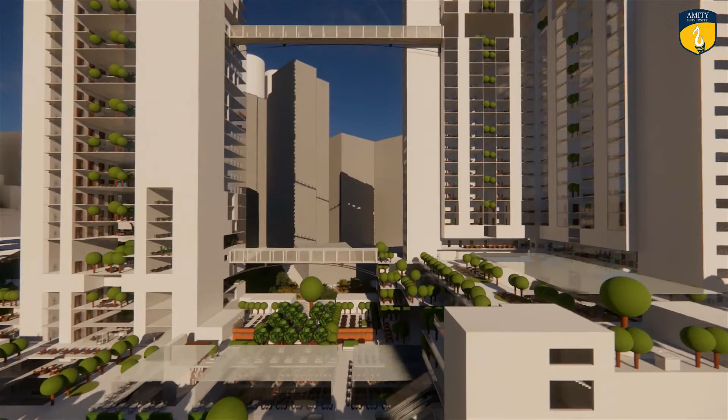Universities are typically horizontal organizations of purpose-built structures, connected by their open spaces of quadrangles and courtyards. A vertical approach to connecting the components of a traditional university organization is rare. Mostly tall structures are used for single purpose, however there are recent examples that develop the multi-program vertical university model, combining the connective quality of the university environment while working within the parameters of tall building model.

The project aims at designing a vertical university as a sustainable design solution for future generations, which can be widely adapted as and when there is a limited scope of horizontal expansion. With the increasing population and growing needs for basic amenities, future of Indian universities will be vertical expansion, which will cut off the requirement of 20 to 25 acres of land to 5 to 7 acres of land.

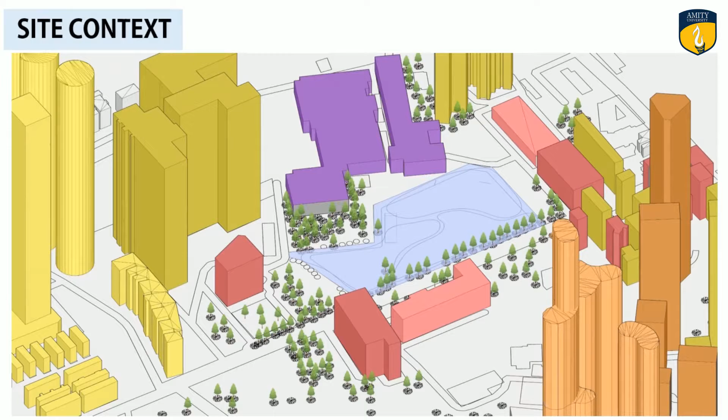In metropolitan cities like Mumbai, the vertical university is the project in pipeline in various parts of Mumbai. The proposed site is in Lower Parel, Mumbai, which is the future central business district of Mumbai, under Smart City Mission of India. The site has a wide range of mixed-use contextual development going on at present, where world-class educational institution will play its role.

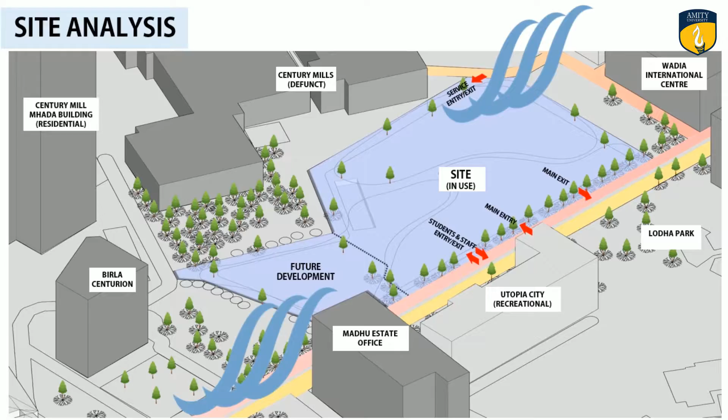60% of the site has been utilized for the project, with entries from the only approach road Pandurang Budhkar Marg with ROW 24 meters. The wind flow is from southwest to northeast.

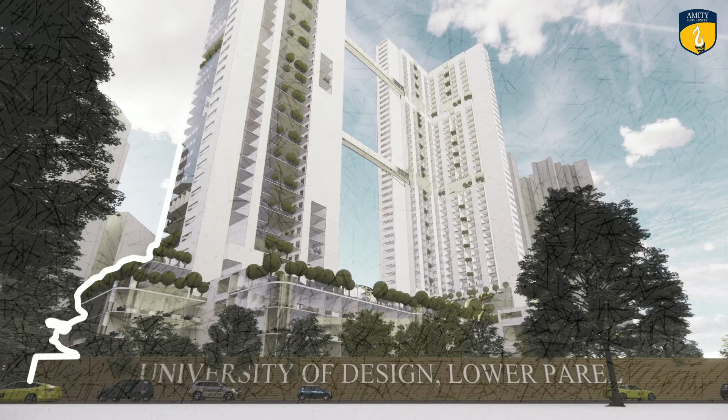Zoning of the site provides us public, semi-public and private zones for further massing. The vision of this project is to not only create a university of design and experimenting it with the principles of high-rise structures, but to also create an identity for the city and catering to the future needs through sustainable solutions.

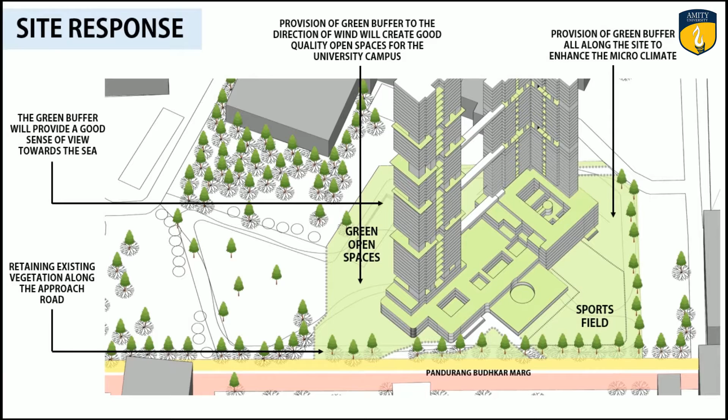As a response to site condition, position of green buffers and high-altitude terraces were conceptualized. Efficient and segregated circulation pattern for different stakeholders is taken into consideration.

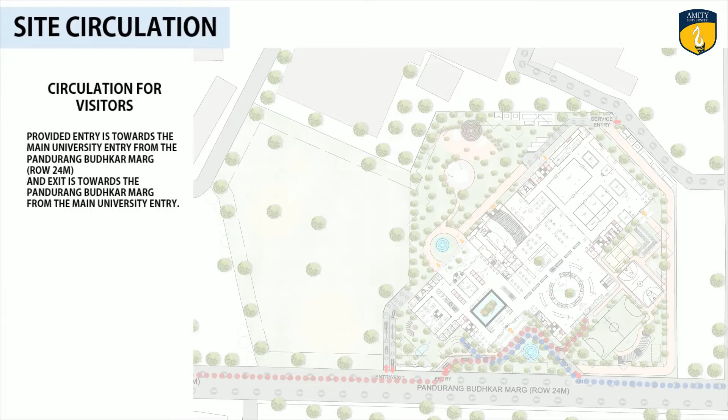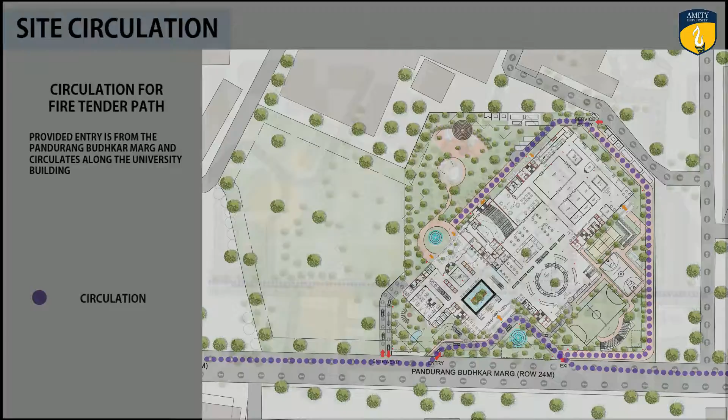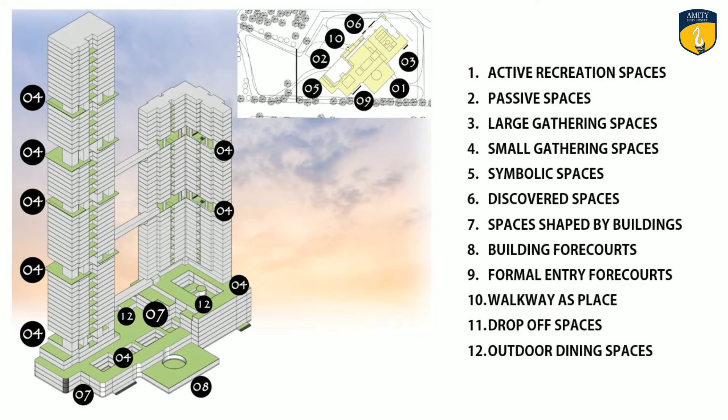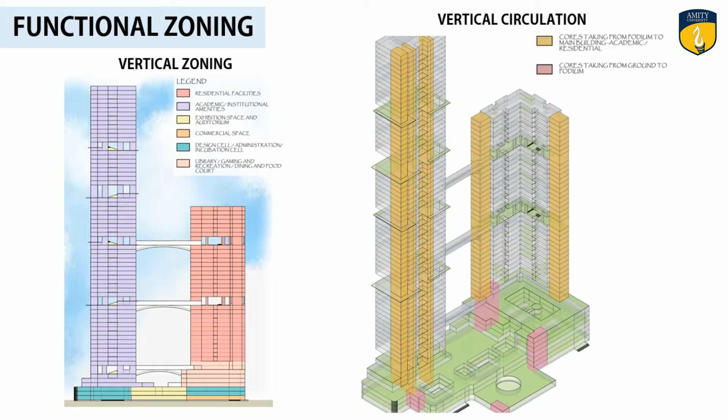The conceptual approach taken into consideration is derived from open space typologies required in a university campus, which is then segregated along horizontal and vertical axis, simultaneously. Various functions such as administration, incubation, commercial, recreation, academic and residential were organized vertically, with direct or connecting circulations. School of Architecture, Design, Fashion, Communication, Visual and Performing Arts was stacked vertically to form a University of Design.

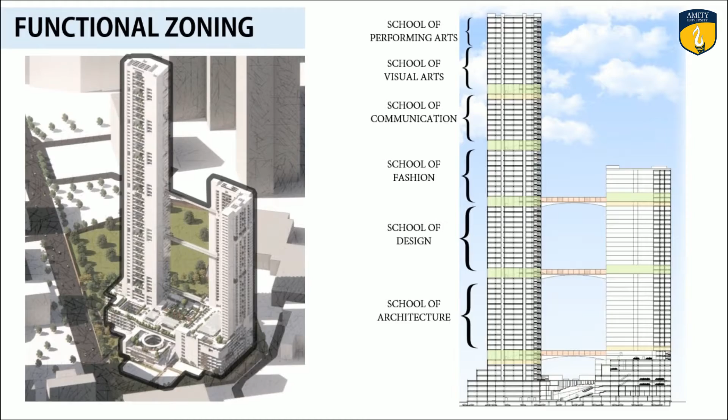Walkway bridges were connected at various levels to ease the circulation.

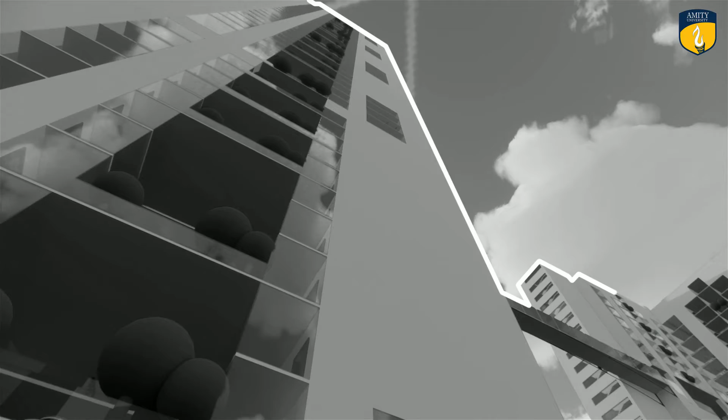The university building becomes an iconic structure for the city and adds to city's architecture. Pedestrian connectivity to the main entry of the university from the approach road, keeping in mind the different means of transport used by the stakeholders.

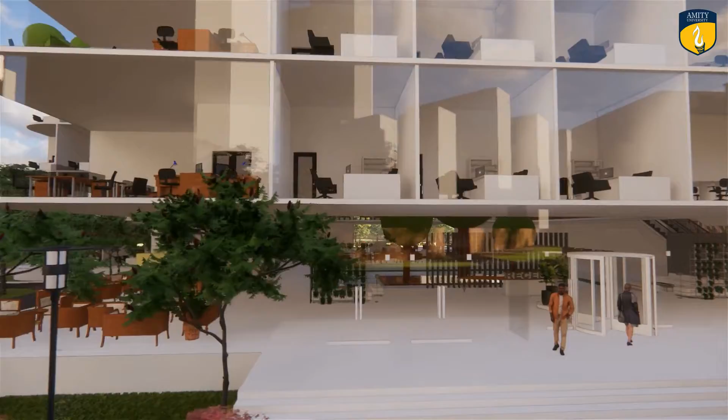Sports fields connected with the terrace and exhibition space to create visual and physical connections.

The academic building is 70 stories tall, with the residential building having a height of 40 stories.

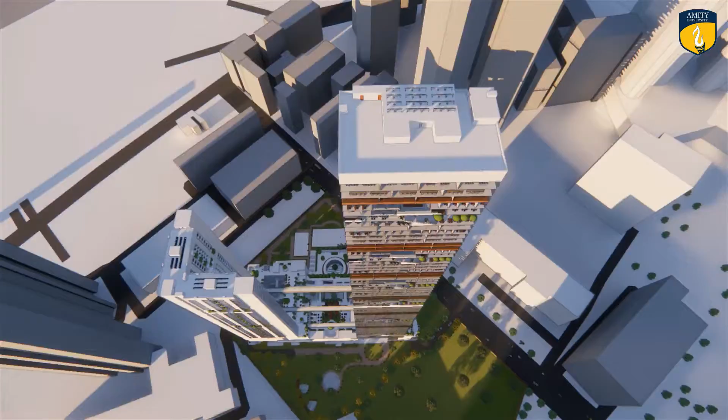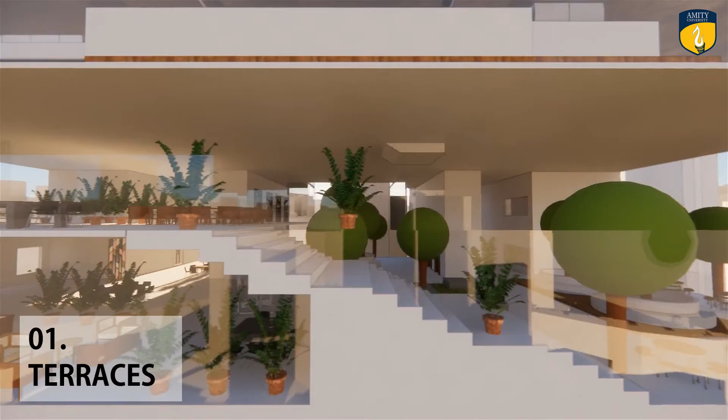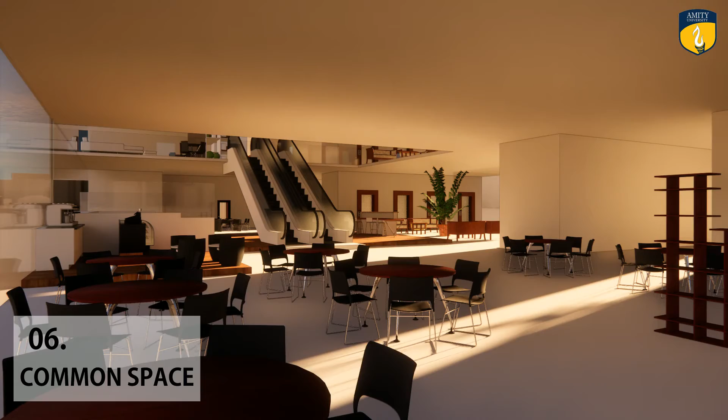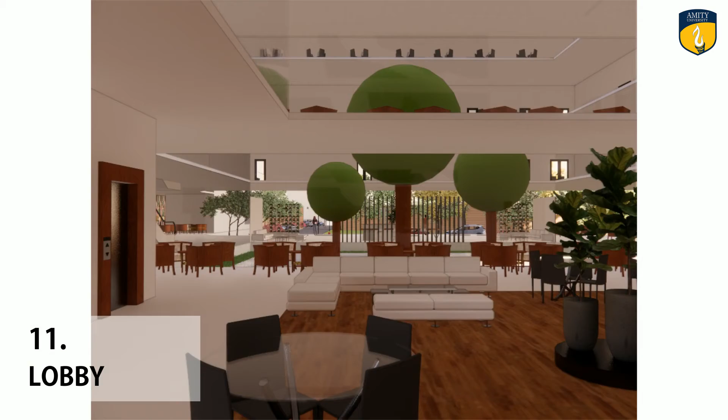Academic building terraces act as vertical connections and common activity spaces between various schools, studios, jury rooms or formal activity rooms, lecture theatres, workshops, common working spaces, informal activity or open working spaces, library, exhibition spaces, entrance and lift lobby, administration office spaces, open spaces, hostel accommodation rooms, and hostel building terraces.

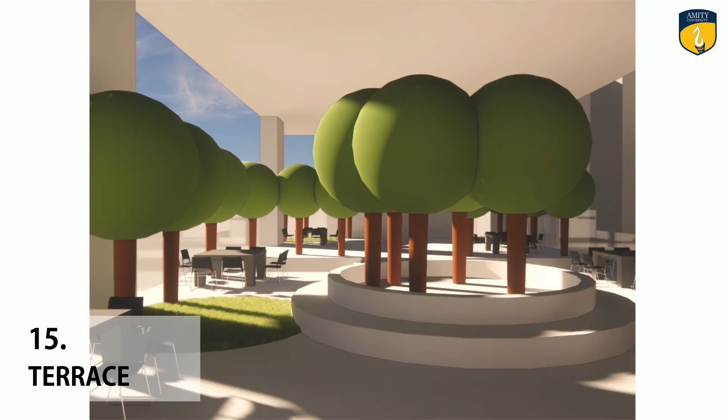The final design of A Vertical University was achieved through iterating various design possibilities. The design will define the city's physical, social and economical characteristics. This will promote education as a key to sustainable development and will change the skyline of higher education.